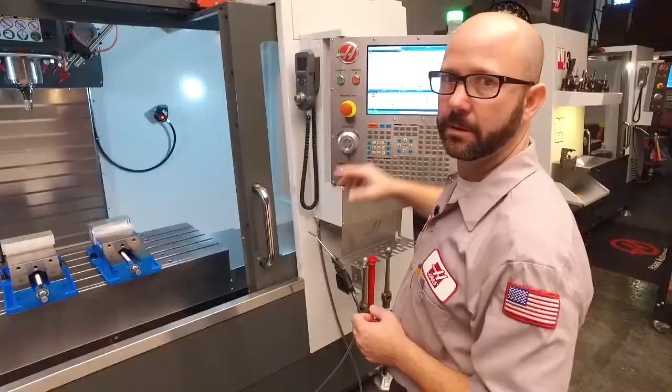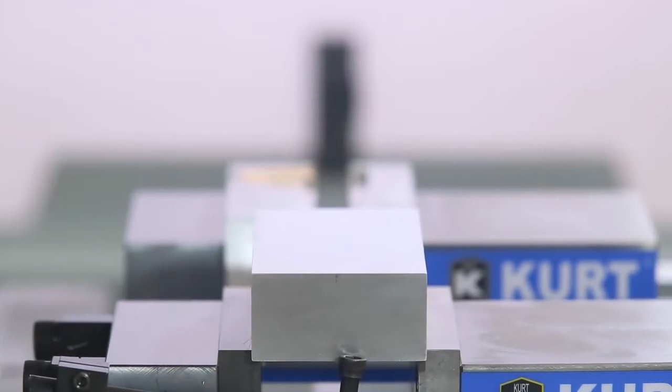Watch the other videos. Now I'm switching over to look at my tool offset page, and all my tool offsets are blank right now as well. So we're ready to start. I've got my tool 1 on the spindle, and I'm going to jog right on top of this left block here. Now, why am I touching off on top of this left block? Because my programmer told me to.

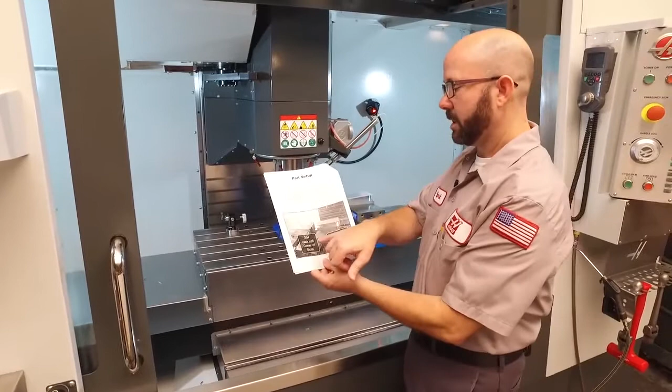I've got a setup sheet here that shows the back left corner is my 0, and it also tells me to touch off on top of that part. So, at this point, I'm going to show you guys how to touch off with paper. Now, there are lots of different methods. We're just going to show you this one first.

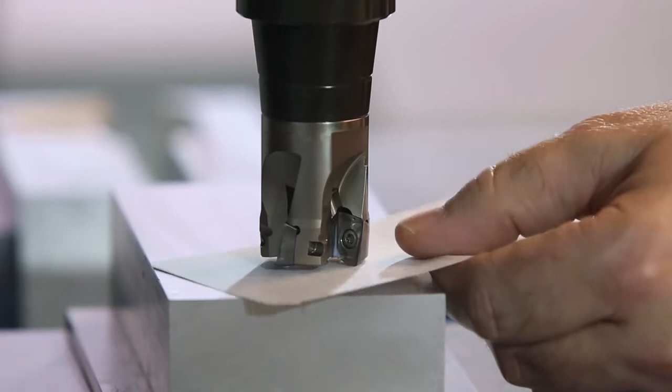With tool 1 on the spindle, I'm going to jog down right above the part, switch it into 0.001 jog increment. Then I'm going to jog down with a sheet of paper in between the part and the tool. I'm going to move down slowly, one click at a time, while pulling the paper back and forth. Now, as soon as I start to feel this paper drag, I know that the tool is pinching the paper and it's where it should be. So I'm going to stop jogging at this point.

I'm going to go to my tool offset page. With tool offset 1 highlighted, I'm going to press the tool offset measure key, minus 18.488. That's my machine position. That's what it's using for its tool offset. We'll talk about that later.

Okay, so I'm going to close my door and I'm going to press the next tool. We're going to repeat this process for all of our tools. Now, we've actually made a whole other video on how the next tool button works. So if you haven't run through the next tool function before, watch the next tool video.

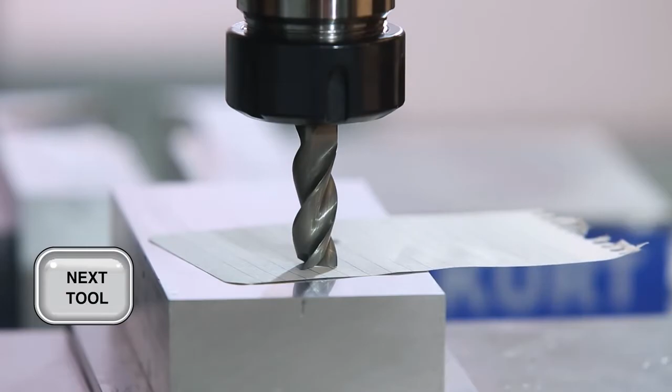This is my second tool, just a 1/2-inch end mill. Again, jogging above the part, little piece of paper. Once it pinches and it stops moving, I'm done. Tool offset measure, next tool. Now, you can get a little bit better tool touch off, a little bit more accurate if you're on 1/10 of a thou increment. For me, if I'm touching off on paper, I'm not too worried about perfection.

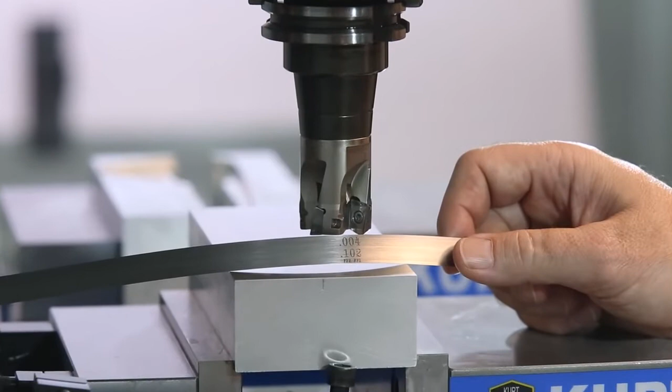If I want to get a better touch off than paper, I'm going to grab a piece of shim stock. This shim right here is 4/1000 of an inch thick. I'm going to take this shim and touch off my tools. I'm going to set it underneath the tool, jog down above it, except this time I'm going to switch to 1/10 of a thou increment. I'm going to bring it down click by click while moving the shim back and forth until the shim starts to drag.

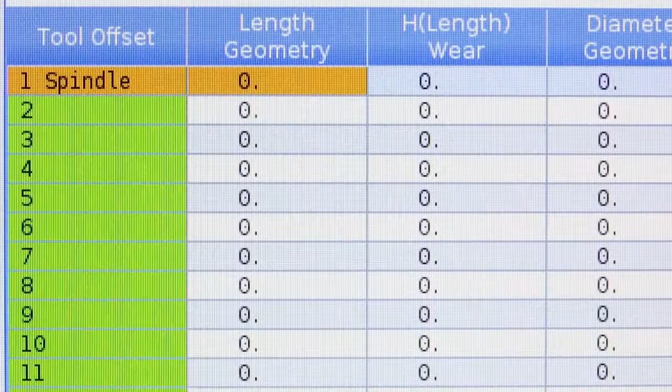I don't want to pinch my shim. I just want it to drag slightly. At that point, we'll press tool offset measure. Now, with this method, we're not done yet. We've got to subtract the thickness of this shim from our tool offset. So I have to type in minus 0.004 and press the enter key to subtract the thickness of that shim

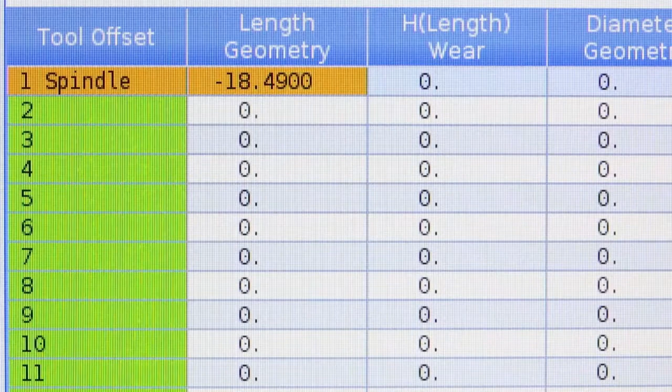from that tool. Now likewise, there's a whole bunch of different types of touch-off tools out there. This is one electronic touch-off tool. If this touch-off tool was placed on top of my part and I jogged down and then just above the part switch to 0.0001 increment and I bring this thing down until this light turns on, then I press tool offset measure. This touch-off tool is 2 inches thick, so I'd have to subtract 2 inches from my tool offset

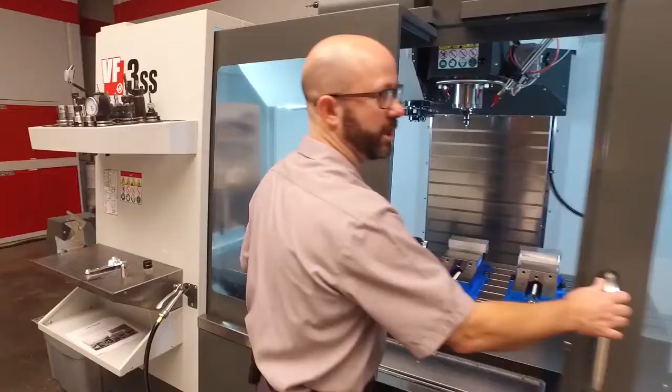measure value. Okay, so we've gone ahead and touched off all of my tools. I think this job had 7 or 8 tools in it. Now what I'd like to do is do a tool change to one of the pointier tools in my carousel. I think tool 6 is a drill. Okay, so I've got my tools somewhere above my G54 part. All my tool offsets are set. I've got tool 6 in the spindle.

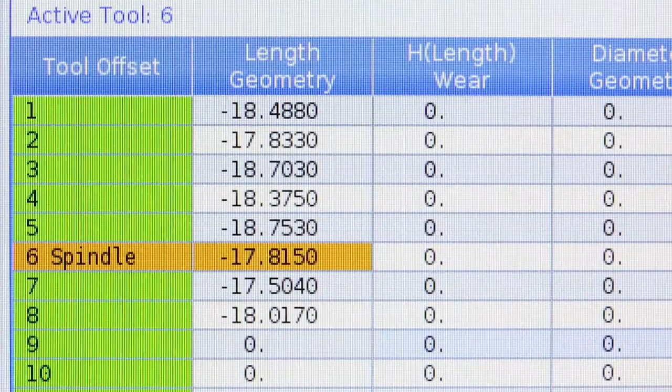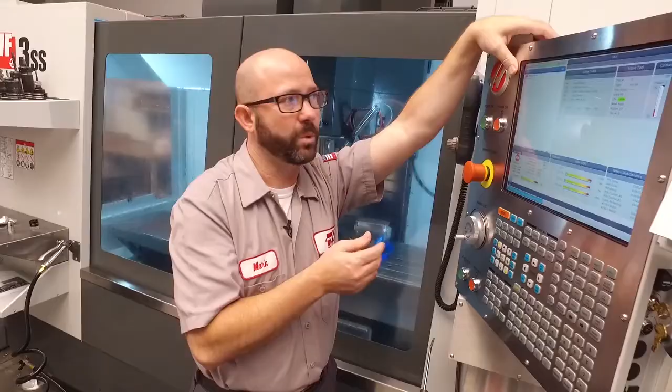Now I'm going to enter into MDI G54, G0, G90, X0, Y0, G43, H6, Z.1, and then an M30. So what we've done here is we've just essentially written a G-code program. This is amazing. If you don't know where to start when learning G-code, this is it right here. We're going to use work offset G54. G0 just means go really fast, rapid mode. G90 means make all of your moves in accordance to the G54.

Now we've got an X, Y value on this line. We want this thing to move right to our X0, Y0. The next line says G43, H6, Z.1. These are the scary moves. When you're making a Z move on a machine, this is what you really have to watch, right? And that's why we're checking it before we run the real program. G43 just means it's going to use a positive tool length offset.

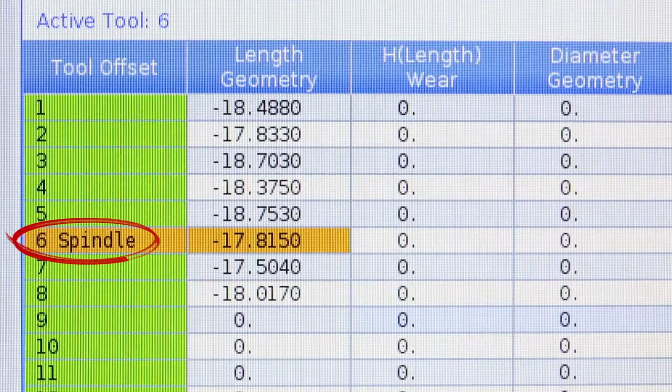Now this is one of the very few codes I don't explain much on, right? Because we always use a G43 in combination with our H value. Why H6? Because I've got tool 6 in the spindle, and I want my H value to match my tool value. Now, 99 times out of 100, or more than that, our H value matches our tool offset. Z.1 means move to 0.1 inch in our work coordinate system. And then we end it all with an M30.

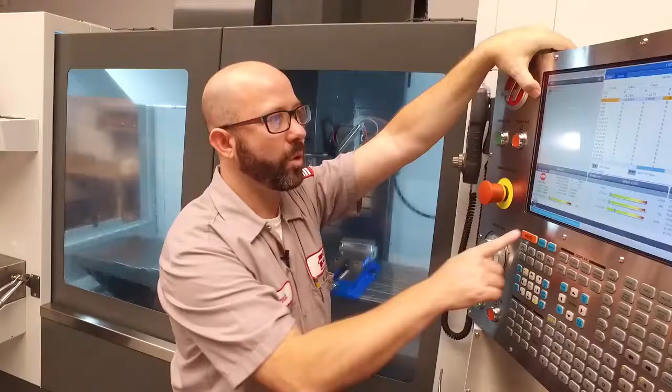Okay, before running this, we're just going to go ahead and go to our G54 page, and we're going to make sure that our Z value on our G54 is set to 0. I'm going to go into MDI, make sure I'm on 5% rapid, and I'm going to press single block. After this positions the tool in the XY, I'm going to press cycle start again. The tool is going to move down just above the part. I'm going to have my finger on feed hold to make sure I can stop that tool, somewhere just above

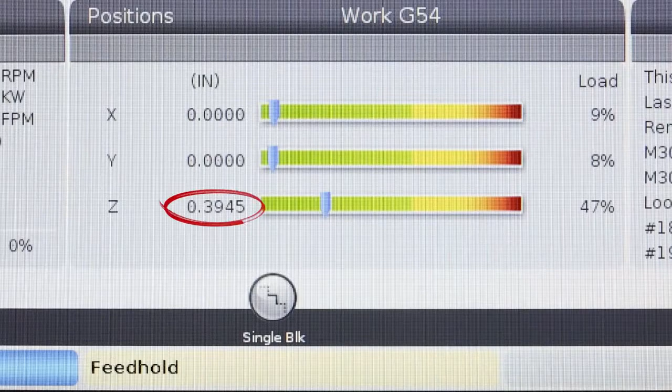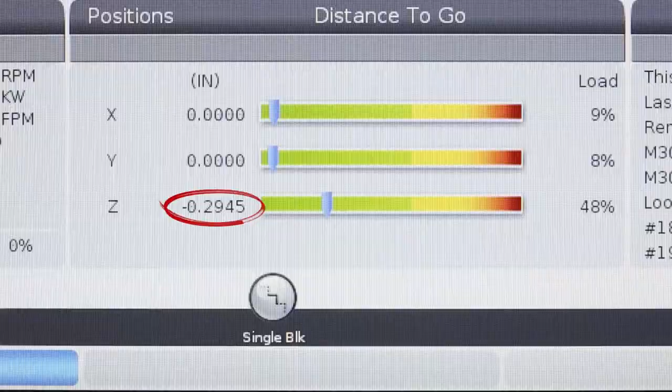the part. Now my work G54 position screen says I'm at Z 0.39 inches above the part. Does that look reasonable? It does. That could be about 0.4 inches above the part. At this point, I'm going to change my position screen to distance to go. If I press this cycle start, my Z is going to move minus 0.29 inches. Is it going to hit anything? It doesn't look like it. So we're pretty safe. So I'm going to press cycle start.

That's it. Our tool ended up just above the back left corner of this stock, right where it should have. More importantly, we're sitting about 0.1 inches above the part, visibly, right? We've just verified that our G54 Z value is set correctly. And we also verified that the tool offset, at least for tool 6, is set correctly as well.

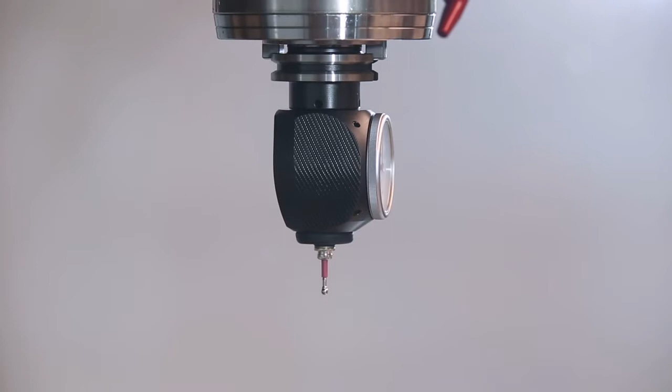Right now I'm going to put an indicator in the spindle, and we're going to set that G55 Z value. I'm going to jog down right above our part, pretty close to where we touched off the tools. And I want to jog down until my indicator reads 0.

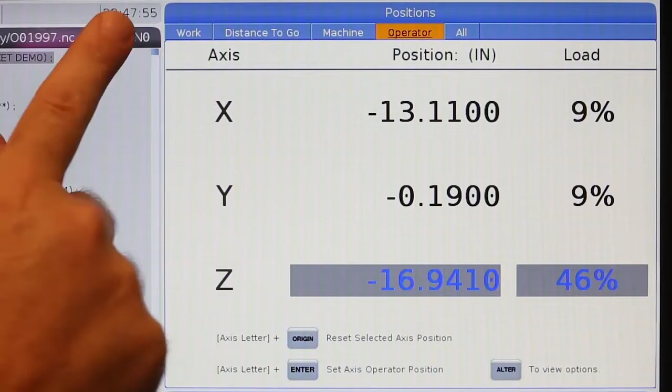With our indicator resting on top of our part, right where we touched off our tools, that's the important part, I'm going to go to my position screen. Then I'm going to move over to our operator column, and I'm going to press the origin button. What this did was it zeroed out my Z-axis operator column.

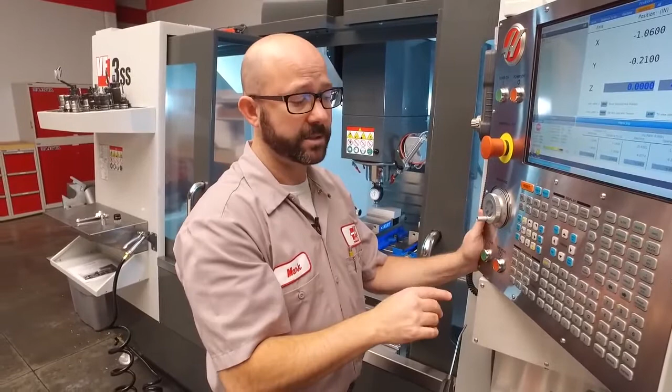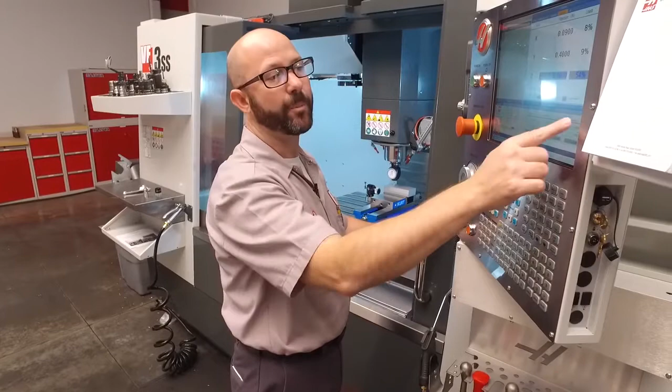Now you can do the same thing for your X and Y axis as well. We could have pressed X origin and zeroed out the X that way, Y origin and zeroed out our Y, but right now we just care about our Z. Now with my operator Z value and my indicator both reading 0, I'm going to jog up and out of the way and over above our G55 part.

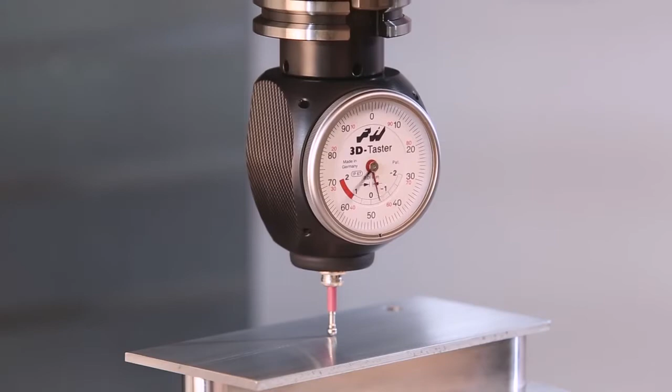Once there, I'm going to jog back down until my indicator reads 0 again. Okay, so my operator Z value now says minus 0.07 inches. So the top of our G55 part is 70 thousandths of an inch lower than where we touched off our tools, our G54.

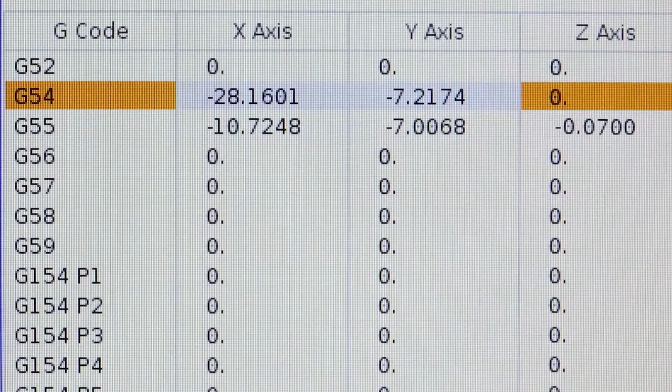So we go to our offset page, go to our G55 work offset Z column, and we enter minus 0.07, enter. So our G55 Z value should now read minus 0.07, while our G54 value Z column reads 0. Because we touched off our tools here, there was no offset adjustment needed.

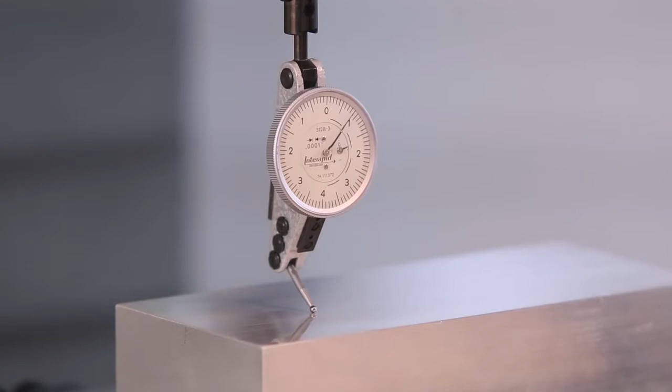I just want to mention that we could have used any type of indicator, really. We just zero it out on the point at which we touched off our tools, zero out our operator Z value, jog up and over to our next vise, in this case G55, find out that position. Now we know the distance between our second vise and our touch-off point, and we enter that in as our work offset Z value.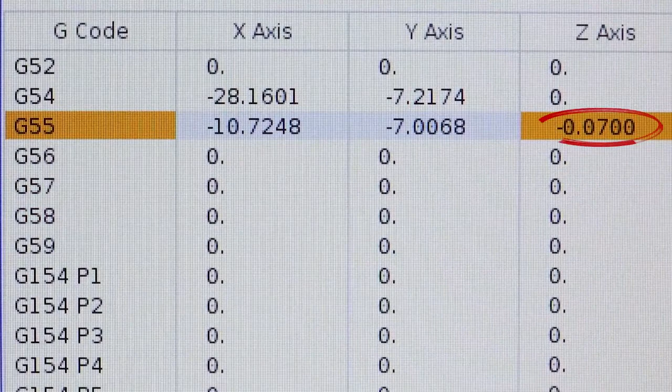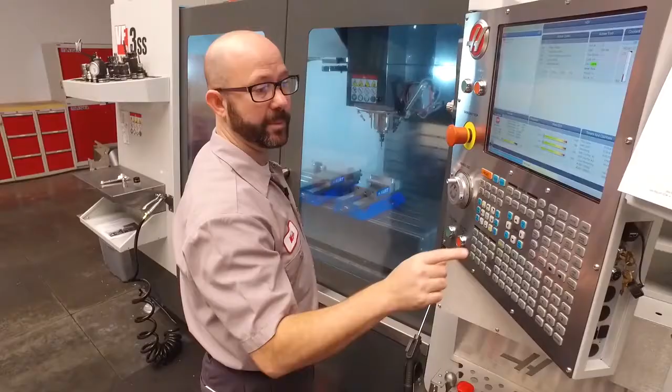Now I'm going to swap out to a pointy drill, and we're going to check this G55 Z work offset. I'm going to jog down to a safe distance above our part. Then we're going to go into MDI, change that G54 to a G55. I'm going to press single block, 5% rapid. I'm looking at my work position screen, and I'm going to press cycle start.

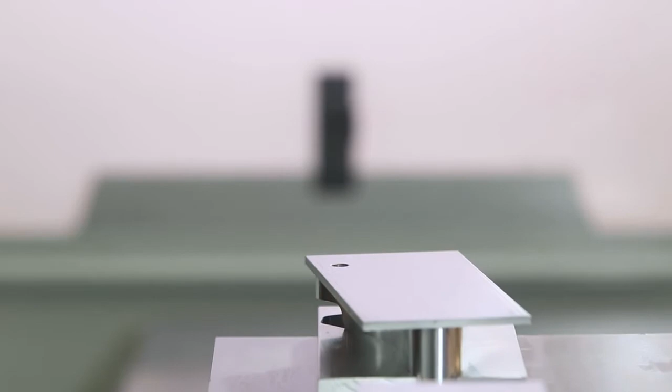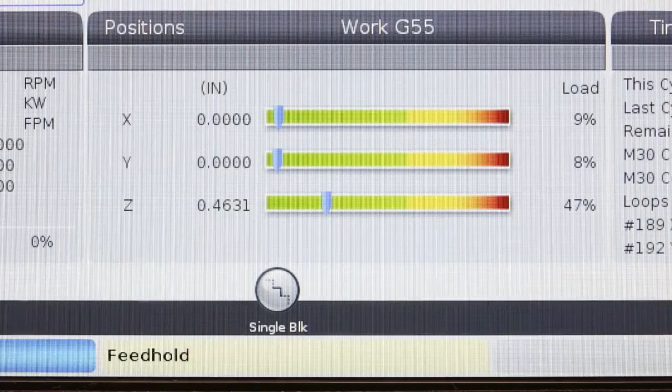So it's moving in the XY first, right above the hole. Again, if you need to learn how to pick up a hole, look at the pick up a hole video. Now I'm going to press cycle start again. And before it gets too close to the part, I'm going to press feed hold. Now my G55 position says Z 0.4631.

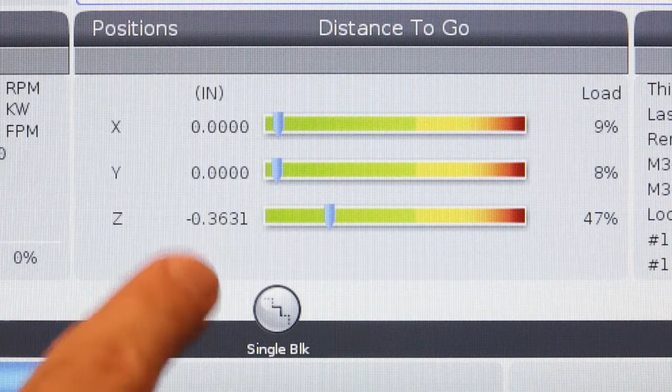Looks pretty good. We'll go ahead and take a look at our distance to go value, and it says that my Z distance to go is 0.3631. So if I press cycle start, it's going to move in the minus direction by 0.3631. That looks fine. So I'm going to press cycle start. Now looking at this drill above our part, I can see that my X and my Y are correct, and more importantly, we're sitting at 0.1 inches above the part.

We verified that our tool length offsets and our work offset Z values are correct for both our G54 part, where we touched off the tools, and our G55 part. Well, we've accomplished what we set out to do. We've shown you how to manually set your tool length offsets. We've shown you how to set those work offset Z values.

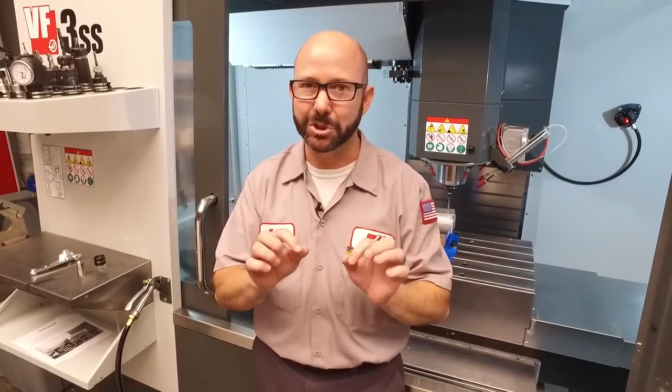And most importantly, we've given you 2 lines of code that you can run in MDI to check your own work, right? Take the time right now, rewind this video, look at those 2 lines of code again. Watch it over and over until you understand them. Those 2 lines of code rest at the heart of G-code.